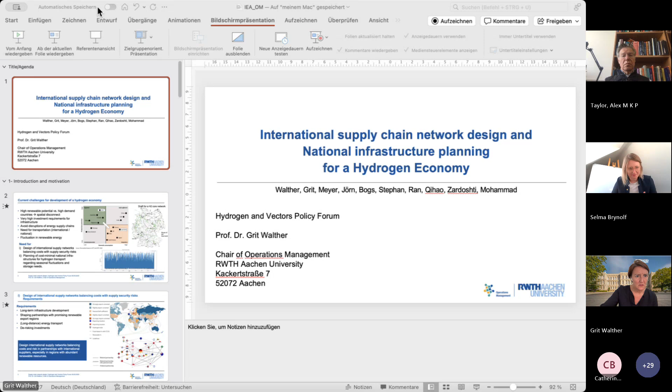Do you see an overview? Sorry to interrupt, you don't have presentation mode view. Maybe it's easy to change. Is that better now? No, we just see the slides where you prepare the slides. I understand. The presentation mode, which I don't see. If you go again to where you were before, I can guide you. I was in presentation mode, but it doesn't work. If you could share your screen again. Doesn't work. I don't see you. I cannot share currently because I don't get a large screen. If you go to the top right corner next to the leave button, there is a share option. I know, I already shared this. Are you able to click on that? Yes, I'm able to click on that, but I'm not able to see my slide now. Okay, but that's the wrong form, right? Now if you go to the bottom right, you see there is 92% that says the zoom. Now go a bit to the left, there it is, click on that. But then I come into a new window, and this is not... I now see the presentation mode, but you don't, right? No. Could you test and share again, and share the new window that popped up? The problem is I can't start presentation mode until I share the window, but as soon as I share the window, I cannot start the presentation mode. Maybe I share that... Otherwise we go ahead and you just need to move slides. Maybe now I see it. Yes, I think now it's possible. Now it's right, thank you. Great, okay, I switched to Apple. Maybe I have to switch back.

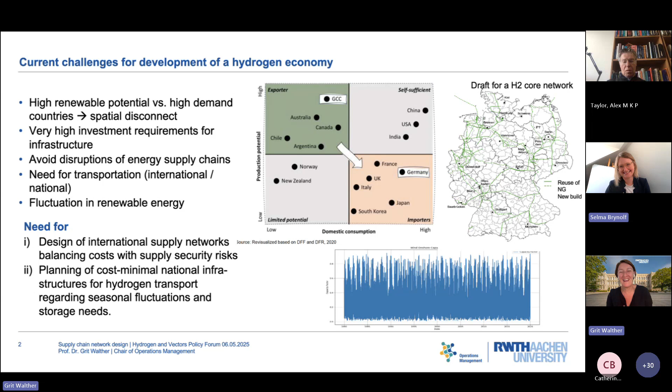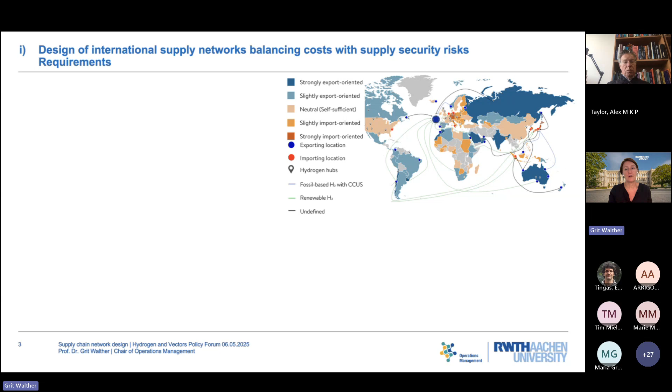So we have two planning tasks, and I have to be fast now. This international planning task, you see just an overview over countries that will have a lot of excess energy in the future or already have, and countries that will need imports in the future. From our German perspective, what we see is that Germany already started a lot of international partnerships on pilot projects. So our question was, how many of these partnerships make sense in the future to also have supply contracts, and with which partners should that be developed?

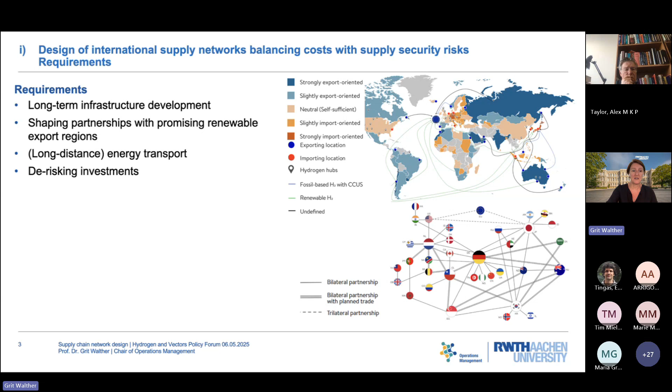We already heard a lot about long distance transportation, which might be a big issue regarding the costs. We already heard about the very high infrastructure investments that are needed. And we talked a little bit, but not too much, about the risks that might be involved in such big investments. And that was what we wanted to look at.

So what we did, we scanned the literature on risks in energy systems, and there is a lot. They use very different terminology and wording. And then we derived out of that 5 risk types: political risk, economic risk, natural hazard risk, dependency risk, and resource utilization risk.

You see all the underlying literature here. There is not too much yet on hydrogen, but there's a lot on general energy systems.

What we found out is that there are two different types of risks. On one hand, we have supplier-specific risks, like political, natural hazard, and economic risks. For these, we can find risk characteristics for single countries or specific regions by looking into the literature, such as the World Bank, the World Risk Index, or Global Competitiveness Index.

From that, we can find information on these different risk types and really characterize the different countries with these risks. But then we also have network-specific risks, like overall resource utilization across all our suppliers, and dependency risk from having a low number of suppliers, which I think we learned in Europe, or especially in Germany 3 years ago, is not such a good thing.

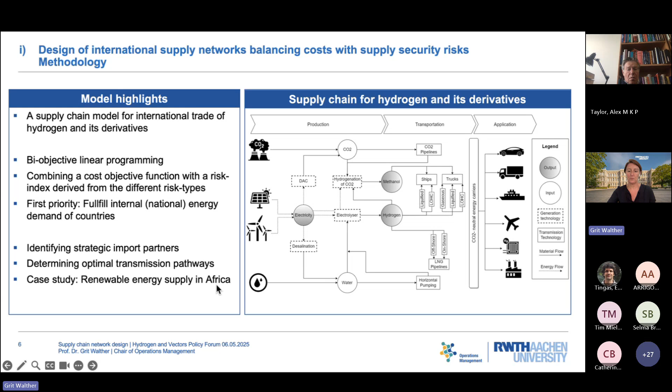We started off applying that to Africa, but the model is generic, so it can also be applied at the global scale. We collected a lot of data. We heard from Chalmers already that there's a lot of data behind these models. It's the same here, with a lot of information about renewable supply, PV and wind power availability, country-specific risk index, transportation costs, production costs, and so on.

This is an Africa model, and I think it should hold for every part of the world. We have a very important requirement, which is to fulfill internal future energy demand first, before anything goes into export.

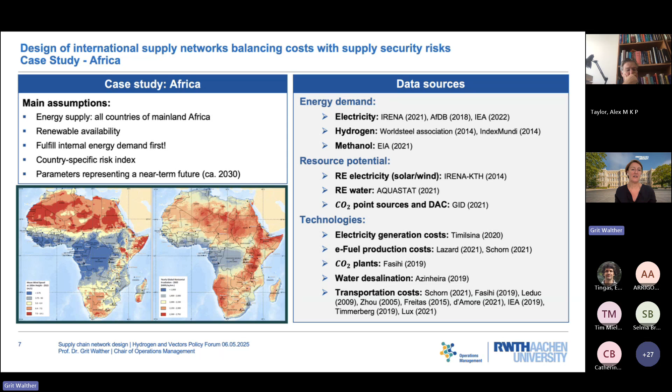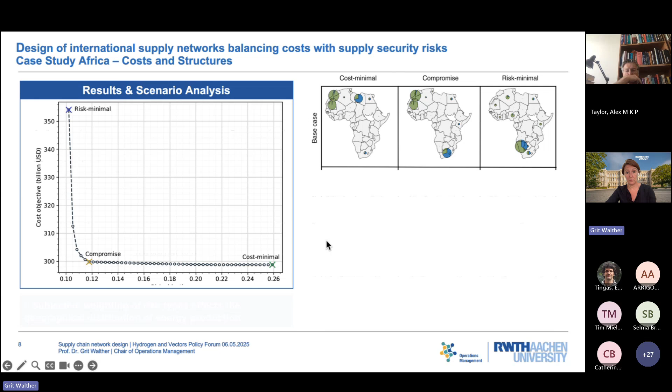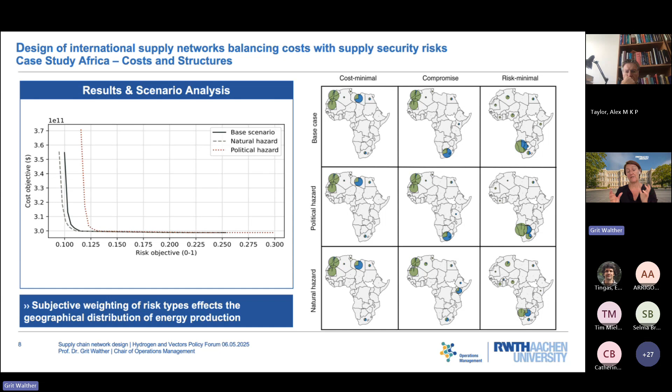We gave different weights, for instance a high weight to political hazards, and high weights to natural hazards. Then we could look at the different solutions and come out with some recommendations here.

So that was our international supply model, and we are still working on that because we want to extend it to a global scale. Then we looked at our national hydrogen network.

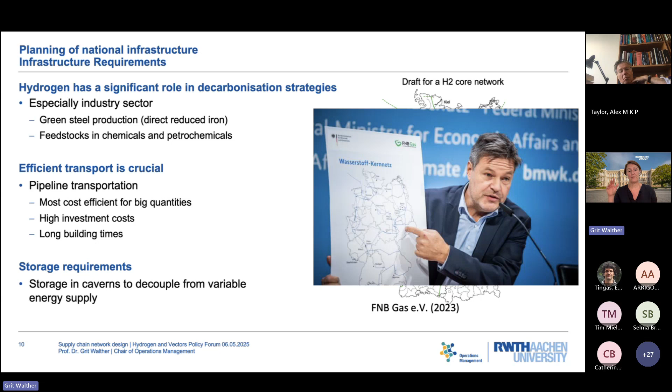We just got this nice talk from Tim, and that was also what we were interested in: how could the national hydrogen pipeline infrastructure look like? What we need is hydrogen to fuel our economy and industries. We need efficient transportation via pipelines, but we also might need storage because of this fluctuating energy supply.

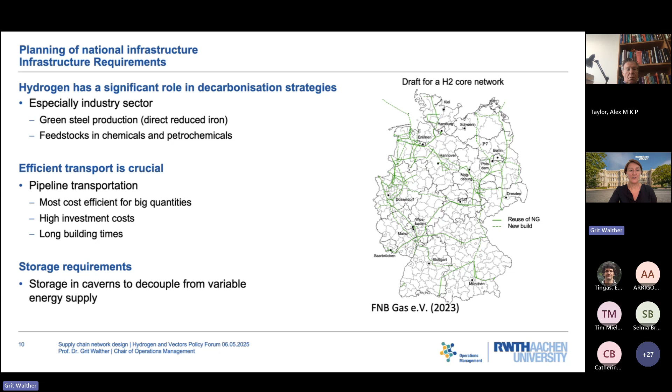We already have a gas network, which we might be able to repurpose in certain parts, but maybe not fully — maybe you have to build new hydrogen pipelines additionally. So what we developed here is a geographical information system based model.

It's again an optimization model with a heuristic that looks for ideal pipeline pathways, not only like the Steiner tree Tim presented, looking for a minimal spanning tree in the already existing pipeline, but also for the option to build new pipelines if necessary.

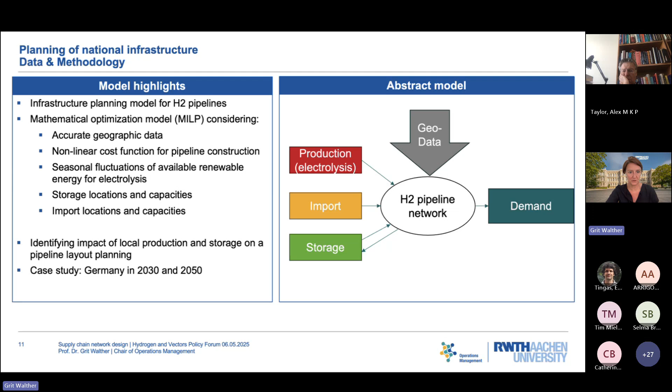So I think it's something in between the Steiner tree model and the engineering simulation model, combining aggregation approaches. We look at seasonal storage options, collecting data on hydrogen production, potential import flows from the sea and from hydrogen backbones from other countries, and demand of industries.

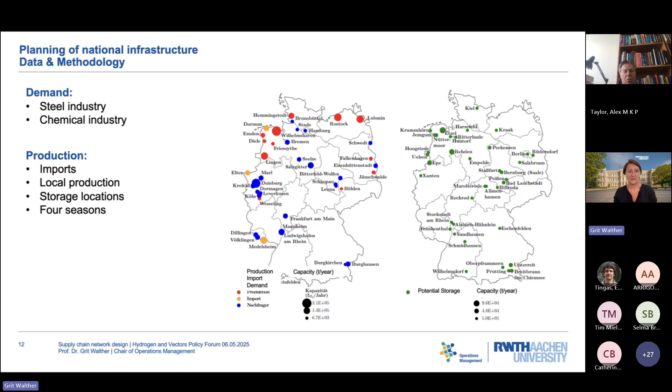We also looked at potential storage options in caverns, which we saw already this morning might be an important topic in the future.

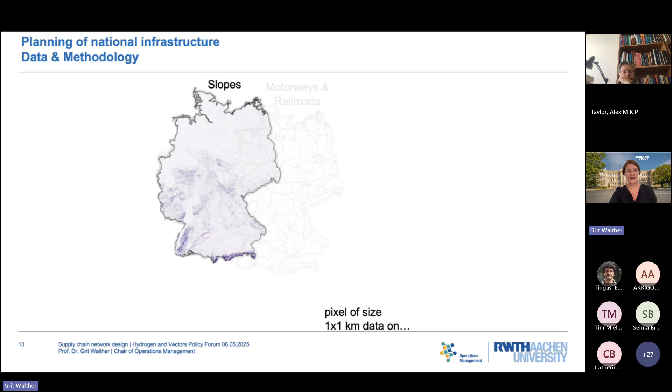In our methodology, we developed a very granular geographic information system of Germany with a 1x1 kilometer pixel size, accounting for slopes, motorways, national parks, rivers, lakes, population density, and existing gas pipelines. We evaluated each pixel with a threshold, so if there's already a gas pipeline it gets a positive value, and if it has something like a national park it gets a negative value.

Then we have a heuristic that finds its way through Germany, avoiding highly populated pixels and looking for existing gas pipeline pixels. With that, we can model future pipeline development over time. You see a solution for 2030 and 2050.

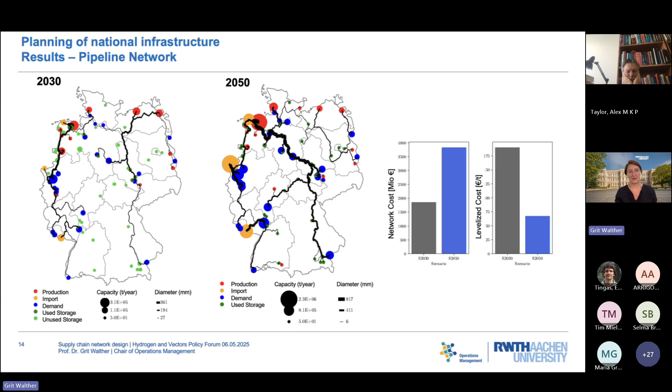What we did a lot was scenario analysis, varying future demand, because we learned from Catherine that there's no commitment to hydrogen demand yet, which is a big issue for such large investments. But with pipeline models we can find robust solutions that already need certain investment in 2030, where we're confident that even with low hydrogen demand we could start investing in pipeline infrastructure or repurposing existing gas pipelines.

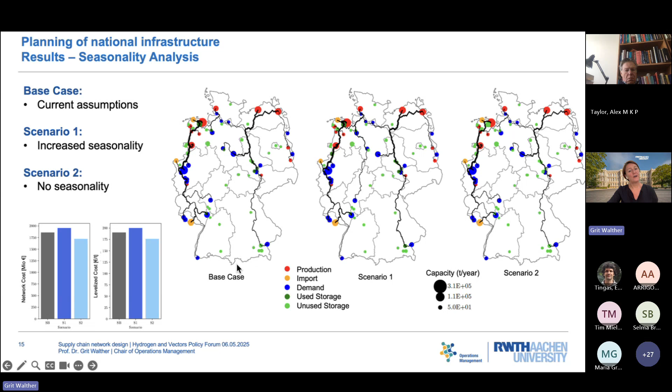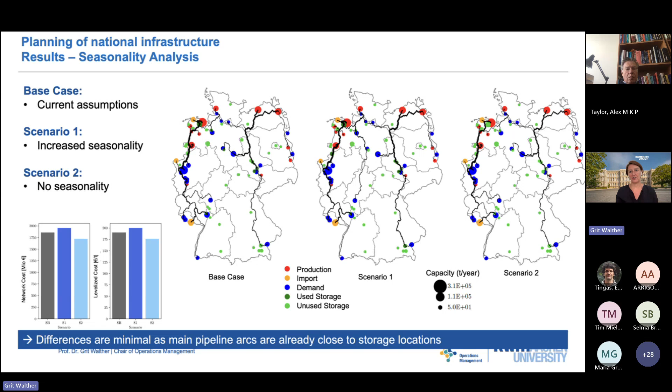We also looked at storage options by varying the seasonality of hydrogen production, increasing or cutting out seasonality from our model. We found that the cavern storage solutions have nearly no impact on the network, because there are enough caverns or storage options near the pipelines necessary to connect production and demand. That covers two examples of the models we developed in the hydrogen field.

In the future, we will include further supply countries in our risk index evaluation. We might look at more objectives like land use and water use that we've also heard about here. We want to consider more uncertainties, with social acceptance being a big topic we want to tackle, and we may couple the supply and transportation models together.

This all goes back to two projects: the High Potential project, a collaboration with Science Tokyo looking at the hydrogen economy in Germany and Japan with many motivated PhD students, a DFG funded project, and our excellence cluster, the Fuel Science Center, where we're responsible for intersectoral and system analysis, also funded by our national research foundations. Thank you very much for your attention.

Looking forward to questions. And you're on time, even though you had problems in the beginning.

I think there are no questions yet in the chat, but maybe some will pop up during the next speaker. So let's look at the Q&A and answer questions later if they pop up, and then move forward. Sorry, there is one question. Perfect, let's take it.